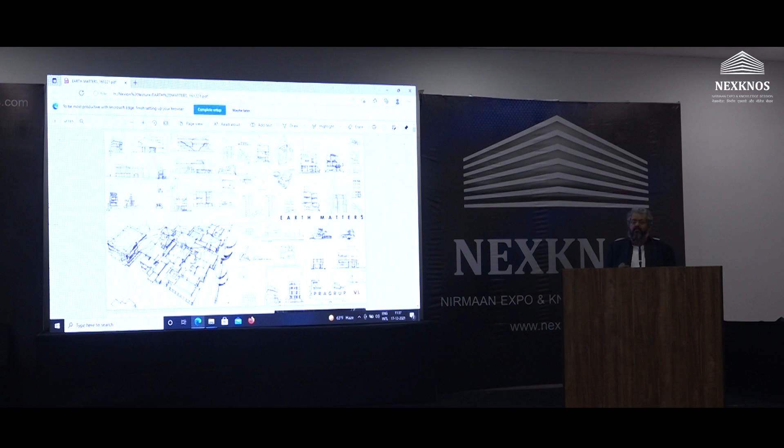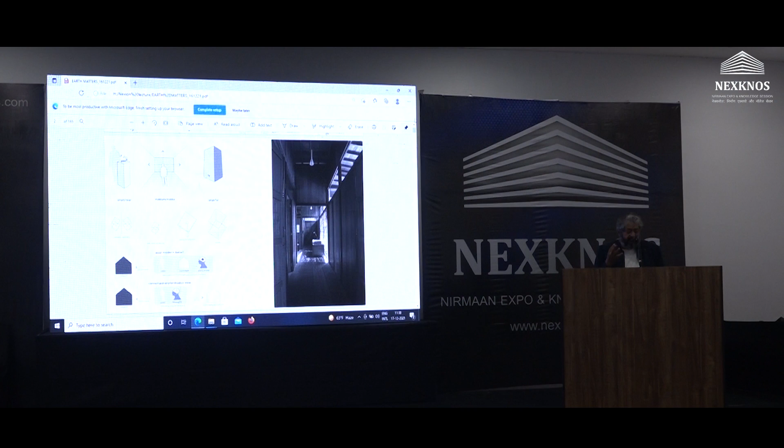At the end of the day, a little consciousness of the idea that Earth matters is all that is important, something we must bring to our life every day. From the space understanding of any kind of experience or architecture we do, it's very important that we establish four simple planes. That's something primordial to every piece of creativity we add. But how do you do that? It's not just a question of letting buildings happen because of the idea of space, next.

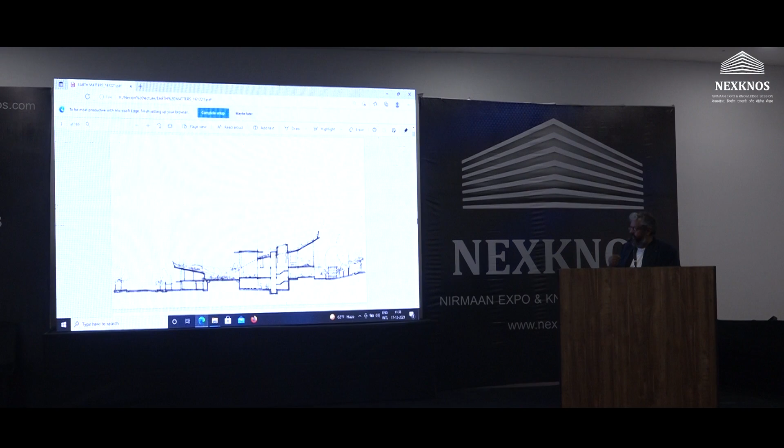It has to have texture, material, understanding of light, understanding of elements. And sometimes we also radically shift to an idea. This is a large house we're doing, around 35,000 square feet, which is interesting because the person can actually cycle up to the last point of the terrace on top, along the edge line. He can cycle right from the entrance gate to the third or fourth floor level, and the section allows you to do that. So again, simple elements like that become the creative impetus we start working with.

It doesn't have to be—architects are here—it doesn't always mean you have to draw a plan and then evaluate the idea of how the spaces work. There are many methods in which we can explore and position.

Now, this is one of my most perfect, beautiful, joyous projects that I've experienced building, which is our own studio, where around 55 of us work. It's more like a workshop space where we have building material and an experiment lab. On the ground floor, we have a large store which also presents architectural products.

Then on the 5 floors we have various studio spaces for each person to work in a comfortable environment. Almost every person gets around 15 feet of table space where he can stack his books, materials, samples, papers and drawings. Added to that, we have an amphitheater where every month we try to host a concert, a lecture event, or some sort of discussion.

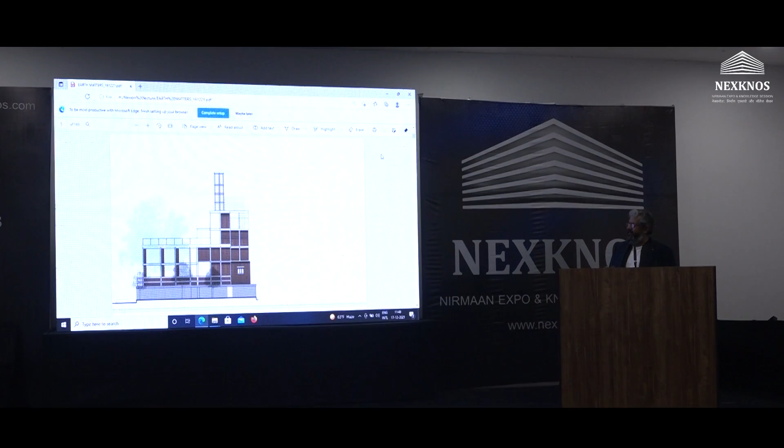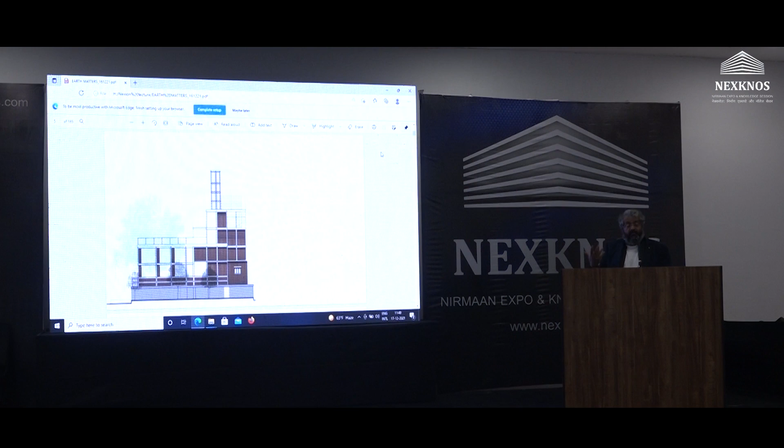It's that sort of facade element which is very simple in terms of architectural presence. When I was drawing this, I was inspired by the words of Aldo van Eyck, who said that a home or a building is absolutely complete only when the passerby doesn't even notice it. It has to gel so well with the rest of the environment, the context and the urbanity, that it weaves more happiness into that space rather than scream and be loud and expressive of its own presence.

So that's the kind of section you see, where the whole building was actually built on two heritage structures, built before independence. It was two houses that we bought. On top of that, without even demolishing the structure, we just put an RCC edge line wall to reinforce the foundations.

And then we put a whole new structure on top. So when we were discussing with the structural consultants, my idea was to build a very light structure in terms of its own dead load.

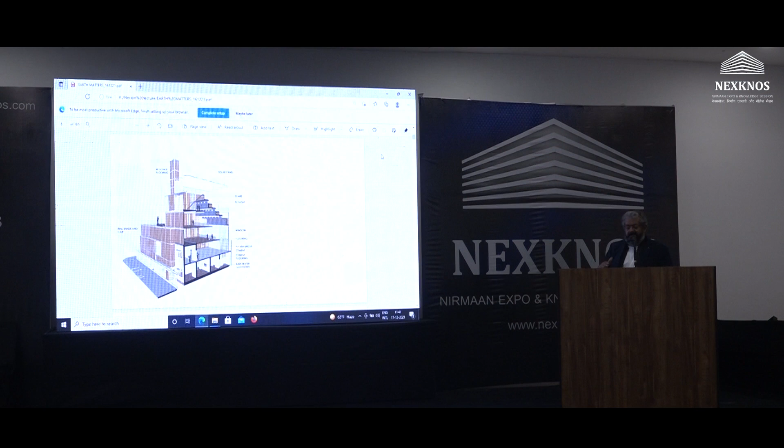Reshma was the site engineer who program-managed the whole project at that time. She's an interior designer and architect, and she helped us monitor every single day what was going on with all the floor plates. All the floor plates are made of timber, so there's no concrete at all, and the final rooftop is made out of precast RCC panels.

Very recently, two months back, a gentleman who actually lives around 6 blocks away came down to my office just to congratulate me, saying that when we built this whole building, which is so mammoth, we didn't destroy the street, nor put any debris on the road, nor was any building material ever dumped onto the perimeter.

The whole thing is a prefabricated element. There is no wet work, no mortar. Everything is bolted into position and erected.

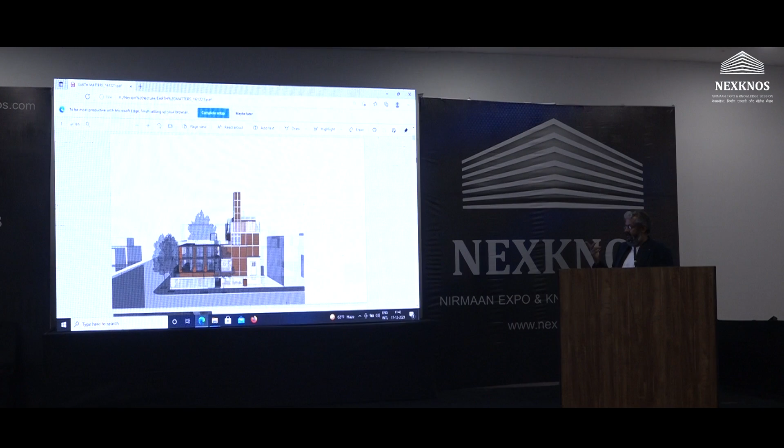Next, these are the actual pictures of the space. This is the roof profile of the amphitheater, and you can actually see from every floor the other floor, so it's easy to talk to people. You don't need to use intercom facility—you can just scream out and ask them to hand over a drawing or say something. 60 people can be in this one volume space, and it's very brightly lit.

That's the light that streams from the north edge so that the whole office, both east and north, is very bright. Ideations that we had done of fenestrations—these are very, very important.

Architects use these particular tools and methods to draw, and the more you draw, the more you make conversation rather than have a verbatim kind of conversation. It's very important for us to create as many drawings of ideas and graphics and design sort of surge, which helps us to actually understand what the building will be eventually.

It was also responsive to the kind of vegetation that was around. There was a very large tree, so we built around it. We didn't want to cut the tree or the branches, so we terraced the whole building to hug the spread of the tree, and the tree acts as a great canopy.

Wherever the shade of the tree was spectacular, we went ahead and put large panels of glass. Where we didn't have the shading device, we did the double wall insulation of the wooden panels.

These are actually existing walls which were built before independence. We removed the plaster and cleaned up the old original bricks, which were of super high quality, and we could just leave them exposed rather than hold the lime plaster, and it became another aesthetic connect to the whole space.

This is again made out of driftwood—you can think of doing even architecture and sculpture using recycled materials. These are pieces of wood which float off on the river, and it's reassembled. An artist friend of mine from Vietnam made this galloping horse out of it.

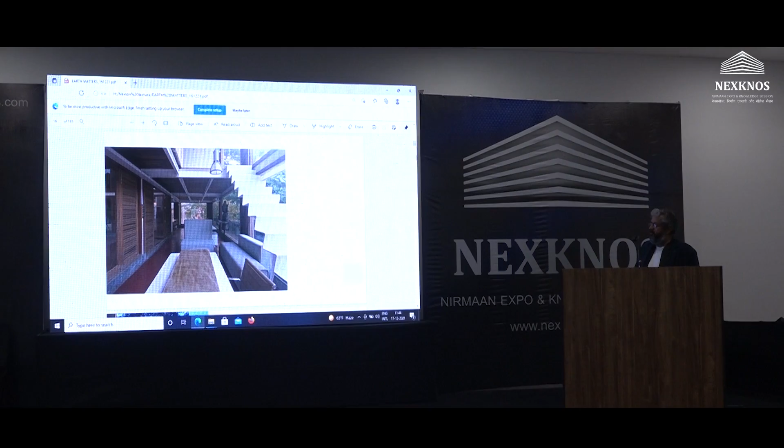Again, more workstation spaces, places to go to the mezzanine. You can see the timber floors on top. The red oxide was the original old floor from previous time. That's the, again, 13-year-old lift which was put into reuse.

We have a shortage of time, so these are spaces where we work out of. Every material, consciously, we said we must walk the talk—what we talk, right? So we made sure that every inch of material, every substrate of that material, comes from either industrial waste or is a recycled element. That was very important for us.

This is another facility which we recently completed phase 1 of. It was an old dilapidated club which was still surviving the test of time—a 134-year-old structure which we pulled back. We completely dismantled the whole roofing system, brought in engineers and carpenters from different parts of the country, and reassembled it to make this whole spectacular space come back to life.

They called us in and invited us to make a presentation. They were very surprised that we had created so much open space, because they had always lived on a completely habituated open ground. We started opening up this whole arena and said that we're going to not build spaces, but design only the largeness of open spaces for a club facility rather than go in for constructed areas.

They actually gave us a mandate of around 75 crores for phase 1. We said that we'll first develop the master plan, clean up the whole ground, and make parcels of land available to build. We only built 21,000 square feet of new construction. Now, of course, we are building another 35,000 square feet as part of phase 1.

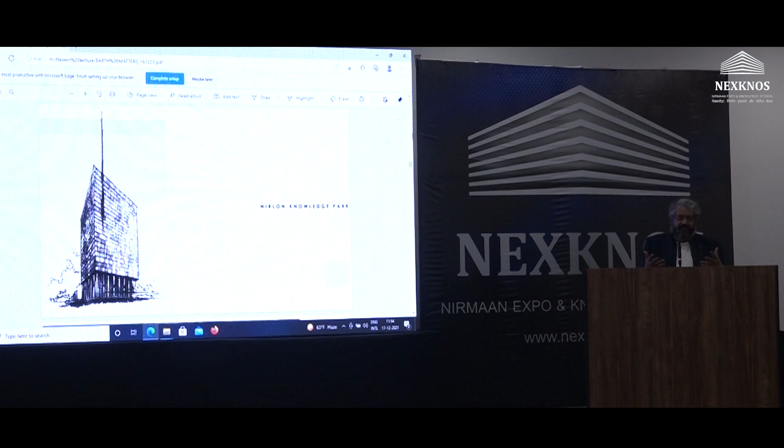Now I'm jumping into a different scale of project. This is the Nirlon Knowledge Park that we continue to build in Bombay. I've been working in Bombay, working with this client since 2002. He's not got bored of me at all, and he still loves to work with me. He's given us two other projects in Pune to build, each around 4 million square feet. Together, this is complete, 14 million square feet, 140 lakh square feet of constructed area, built over a period of 18 years.

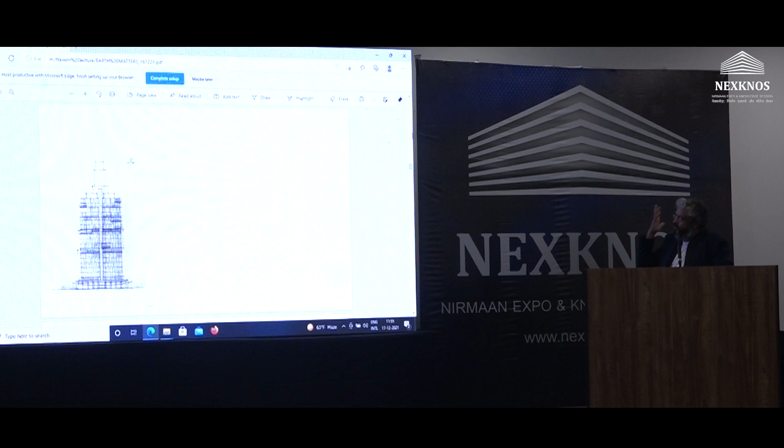Some of the sketches we started doing - this is what I drew in 2001 for the main tower, and then we iterated. Mostly the problem with my office is they tell me I don't stop wanting to change what I want to draw, and I keep drawing more and more. These conversations, as I said before, are very important for an architect to have with his drawing board, so he can evolve ideas, make conversations with his drawing, and the drawings communicate back to him. That's how you evolve the idea of design, rather than thinking this is my first sketch and that's my final.

So these are various kinds of articulated elements that we did for the master plan and to create an urbanity.

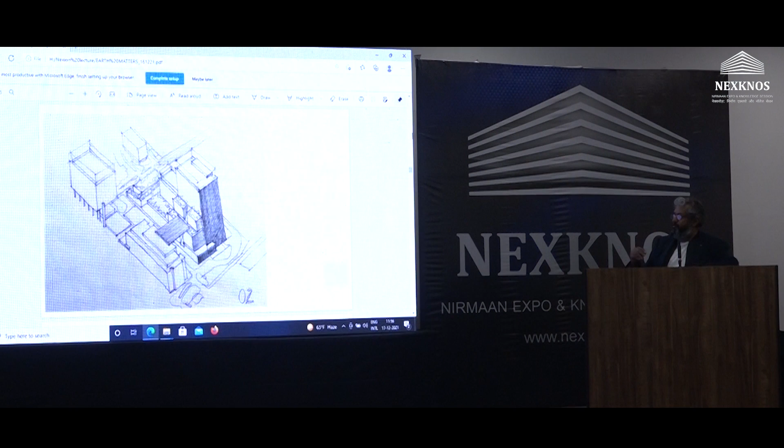This is one of the parks which I boast completely that even if Bombay gets flooded, there'll be no water in this particular area. We hired Dutch engineers who actually make dams and created the whole plumbing and sanitation and stormwater drain network. There were 3 Dutch engineers stationed on the site. We imported equipment and elements so that 4 levels and 3 levels of basement are absolutely dry. This is one of the feats that the client encouraged us to do, and we were able to achieve it while developing ideas of the master plan and how we integrated massing development.

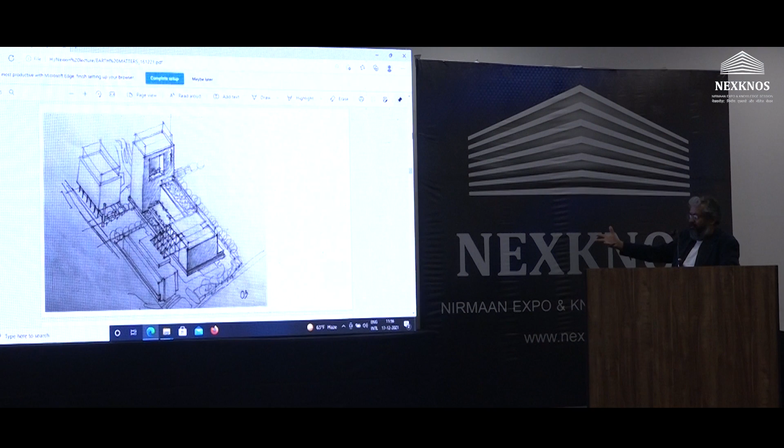Especially when you do a large 27-acre or 32-acre campus, it's very important to analyze figure ground - how a building actually captures the plinth space of what you want to build, and what must be the open space that it encapsulates. So these conversations become very important.

And this is the tower that we are building now. JP Morgan has actually bought the whole building, 5 million square feet, in one shot, which was the largest real estate transaction ever done in Bombay by one client.

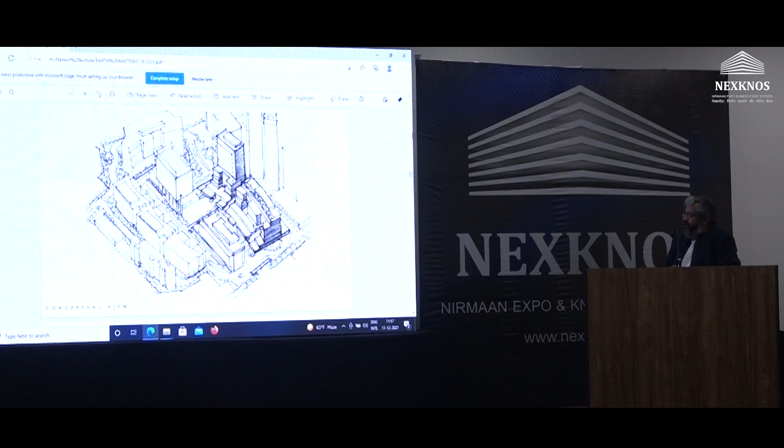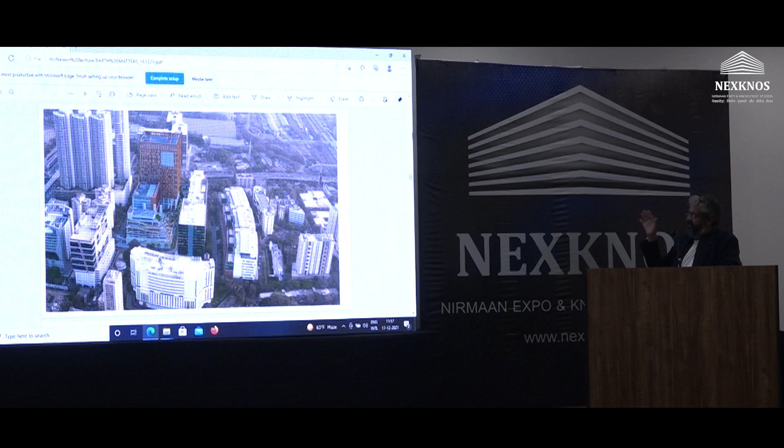That was the master plan, the final master plan that we did, and some of the work sections. That is the actual built master plan that we have today, and these are visuals of what is there at the site from an aerial point of perspective.

All this water is coming from the toilets, urinals, and wash areas of the whole building. We filter it, and there's a 1 kilometer long water body created for aeration, which is the central aspect of the whole landscape. It was so beautiful, and the grass loves that water, getting the best nutrition it needs to grow healthy and happy.

The client was so impressed with this eventual product that he got married on this lawn next to the water body, and that was a great position of pride. He said, 'I'm not going to go to any hotel because this lawn and this water body is precious.'

This is again recycled content, which we are programming into a very large structural element. It's a spectacular space where people sit around in the afternoons and evenings, whiling away their time, and they have music concerts happening here too.

That's the lobby space of the tower. It's a 7-volume structure, and from an aerial view, you see how we built different phases of different scales of buildings to bring in a multichotomous kind of architectural experience, rather than making one tall tower or similar tall-looking buildings across the campus.

So all the terraces become very interactive and accessible. Each facade is different - for example, the north facade has a lot of glass, east has less glass, while west and south have no glass, only the absolute minimal needed.

So the buildings were looking very funny. When we presented to the client, he said, 'Why is your building looking very different on all 4 facades?' But then when we showed him the simulation, he was impressed.

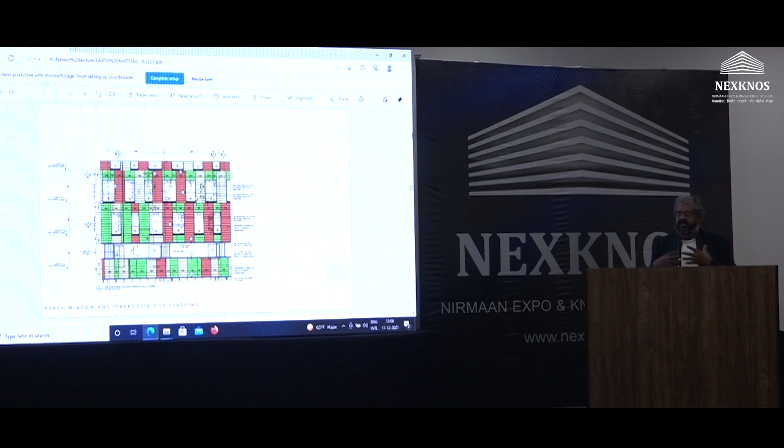We told the glazing contractor that we didn't want to do a 4-way unitized system costing 1,800 rupees per square foot. Instead, we did simple punch windows costing 650 rupees per square foot, and used the saved budget for external paneling with terracotta wall panels in 4-5 different shades. That's the sections of the plan.

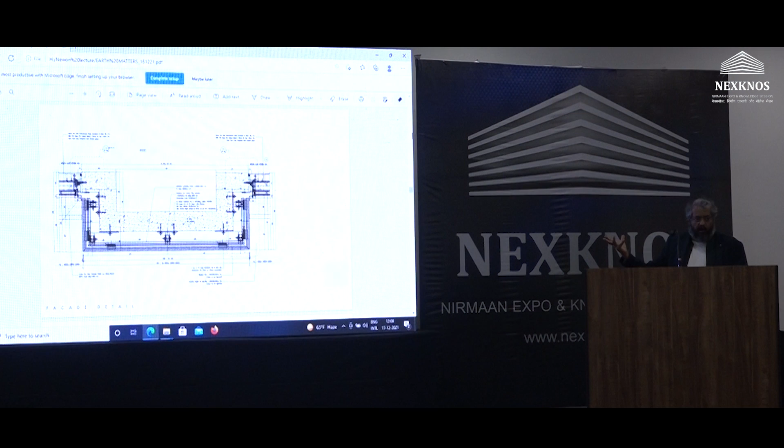Next, how the thermal wall insulation works. It's a very complicated wall that we designed, but it gives us the temperature we desire, especially during peak summer, showing the aspects of how the louvered elements were done.

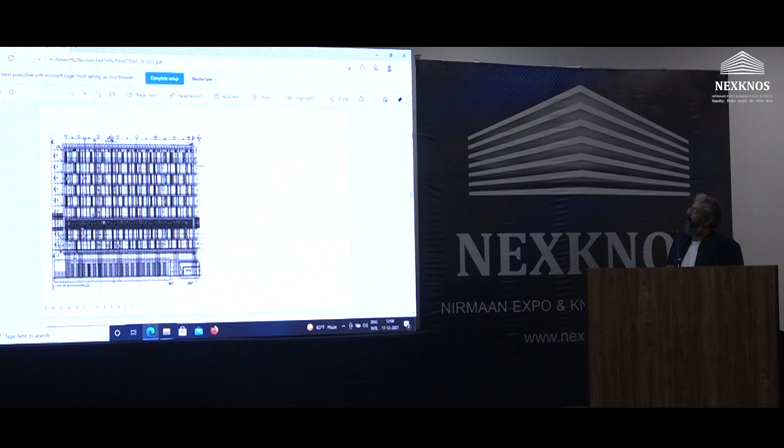This is the facade coming up as we talk now - the construction happening for the 4 million square feet tower. Also within the campus, when I was talking to Kunal, his father actually built this.

This was a factory, the Nirlon factory, where Sunil Gavaskar had his first job. It was important for us to keep the historicity intact.

So the glass tower you see, the 5-floor glass tower, has this huge wall mural where all the photographs they captured of their factory were positioned, and there's an experience museum there.

These were the chillers, generators, and the electrical panel which gave energy to the previous factory complex. We designed the master plan carefully so that the chimney and the old energy block was retained, and now it's a bar, cafe, and restaurant which feeds the afternoon cycle of people who want to eat out.

We haven't even removed the chimneys or the exhaust ventilators, and it's a great experience to sit in what was once a chiller plant room silo, having lunch or enjoying a bar experience in the evening.

And this again becomes like a memorial. So it's important for us to hold that historicity and significance of heritage back into a position to keep memoirs.

That's the walkway line and huge wall ceramic murals. All this is terracotta, completely made out of clay.

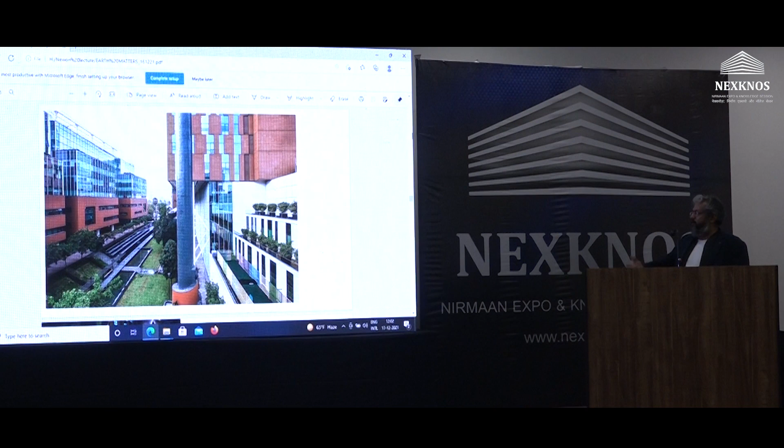That's the chimney where we included an artist to create the idea of an azimuth of the earth, and to also give an experience of an ascent, which are certain jargons that most of these corporate honchos would love to talk about. So it became a symbol of that sort of an experience.

Many terraces to include landscape. We actually gave back more earth to the site than we captured. We have almost 24% coverage, but we've added 68% more green terraces and green slabs for the project, which adds more surface area of ground footprint that you hold back than you build. So it is another spectacular marker that we think we should do for the project.

The silo, this is the ascending man sculpture, next, which was actually the old chimney.

What is fascinating is the water body has edges with many filters, block lines and pump lines, so it can be easily serviced and accessible. Some of the staff take responsibility of working with that as part of the workshop area, which is fascinating for the campus.

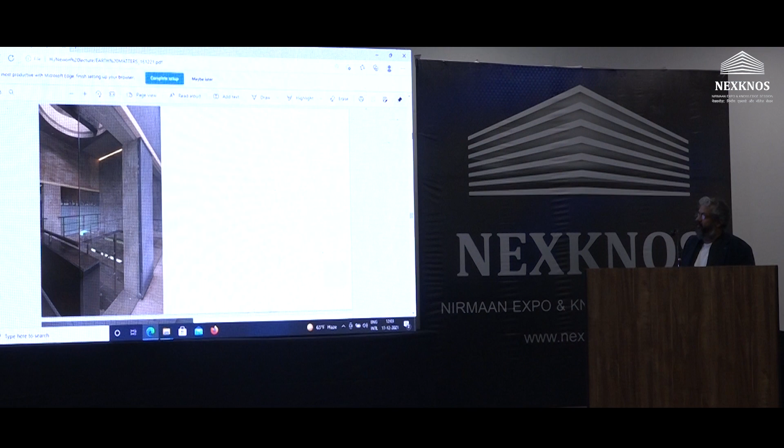Reception centers. This is the inside of the restaurant and the cafe, the silos of the chiller plant. That's the present phase of the building. B11, 10 and 9 is what is coming up. It's going to be occupied by JP Morgan.

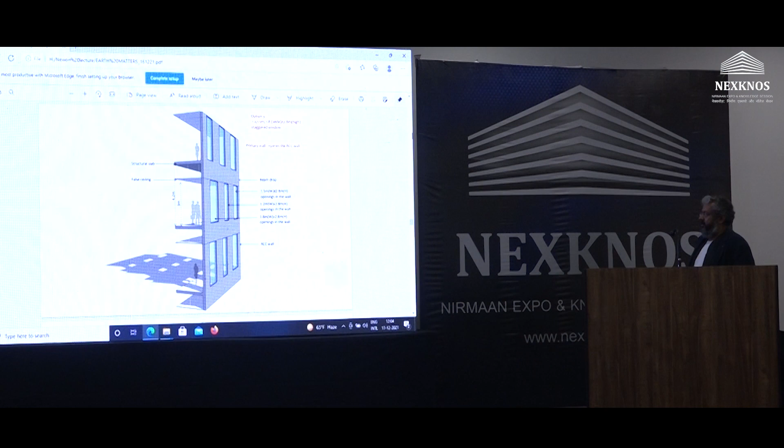That's how the skin of the wall was done. It was an RCC solid shear wall. The terracotta paneling, next - an additional layer of paneling was done as a secondary walling system.

That's how the facade actually looks. It's a very multicolored matrix. It's the diversity of India, I call it. It's a very, very bright orange building. Mr. Modi might like it.

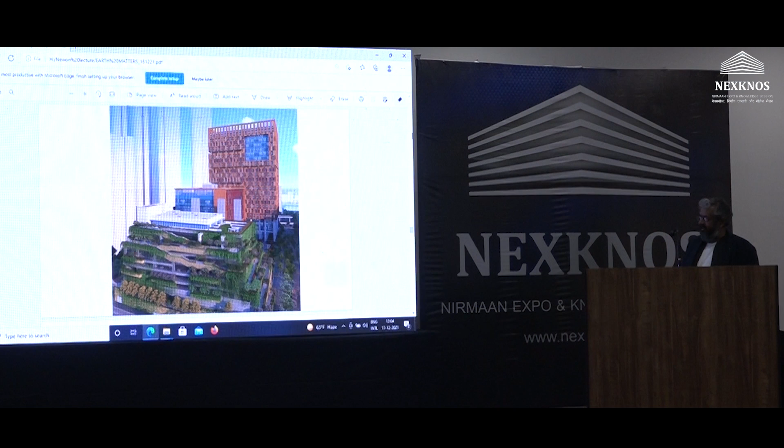Another facility that we did in the same region, Lupin Laboratories, which has been positioned for the third time as the best laboratory practice and architecture award for Asia. It also won the WAF award for the best landscape and architecture master plan.

The principals and people were working in a campus which was low rise. We wanted to bring in a certain joy of experience for the first 3 levels of laboratory, so that they actually sit in landscape and work.

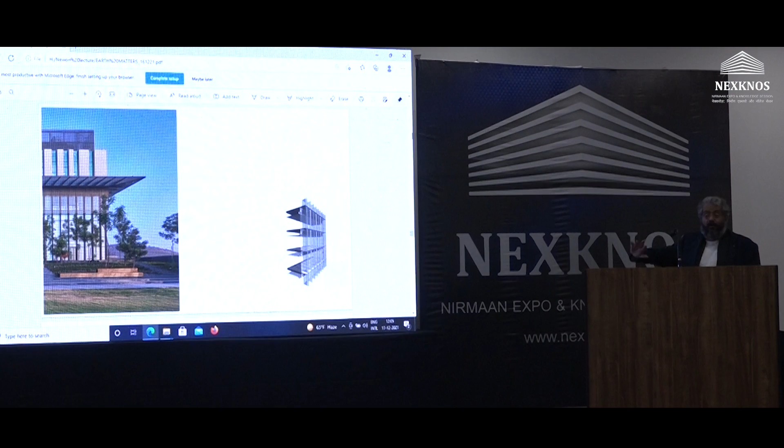So we made an all-glass building, which is a very contrast to most other kind of architecture, but we started working on the landscape.

Each of the glazing systems was done as a triple layered glass with not only hermetically sealed elements within the 2 sandwich panels of glass, but there is a layer of another airlock before the other panel of glass. The plan was very, very simple.

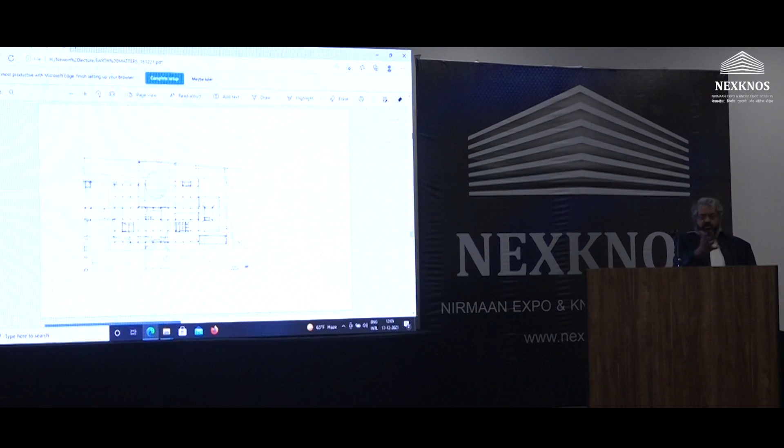It was built like a cabana pavilion within a huge landscape precinct of almost 6 acres, and the ground footprint was kept as low as 31%. It was a low-rise structure, and all facades of the glass completely connect to the landscape. So we started actually designing the landscape as a master plan idea first, before even doing the building.

That's the amphitheater, which is actually annexed to the principal's cabin. He loves to meet his people and discuss with them, have conversations. So we gave him a space where people can gather.

All the perimeter wall panels, what you see as a vertical element, just like what you saw in the studio, is actually timber. It's a timber, aluminum, steel integrated secondary skin, which acts as a support structure for the whole building as the tertiary column wall line. That also adds to the making of the building, where you use the glazing system as a support structure rather than just as an added-on skin to the whole building.

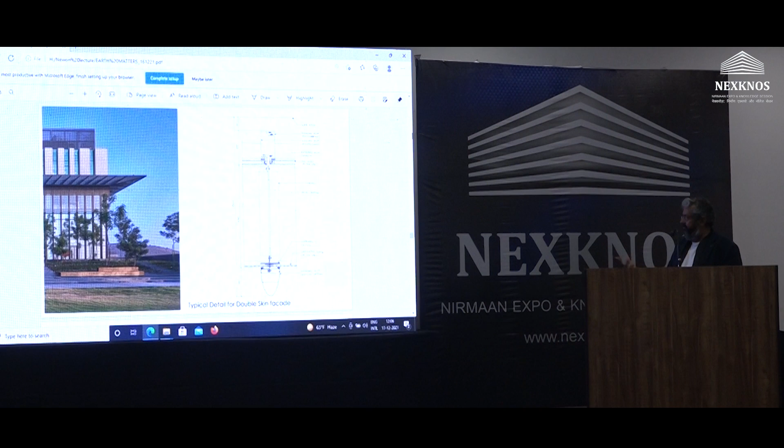These are the landscapes as you arrive into the courtyard. Next, some of the details that we worked on.

The corridors, which are only for access to service and to go into AHU rooms and some of the solvent stores. It's a very intense laboratory, which actually works on tuberculosis and on Ebola.

That's the landscape that you actually connect with when you sit in an office space or a workspace environment and you see the outdoors.

The wooden pavilions, and all of them are networked and wired, so people can actually grab their laptops and go and work there.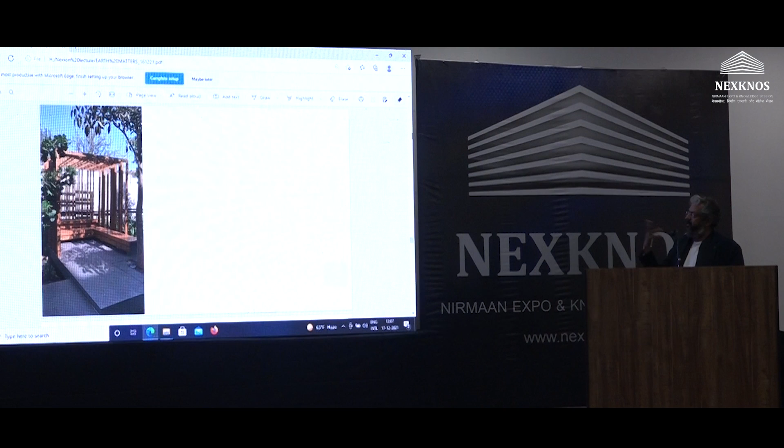This is the experience from the inside of the workspace area to the outside. This is the boardroom view. You actually feel like you're in a boat.

These are the vegetable gardens we added to the perimeters of the dining facility. People take turns bringing their own plants, and they have to post pictures showing how the plants are growing and how much vegetable they got. They must weigh that on a scale. We started discussing this with the boss of the company, and he was very excited and said, facility manager, you must make this happen here. Now they actually get awards as a corporate for having grown the maximum amount of urban farming vegetable garden, and it's spectacular that they've won that award twice in the country.

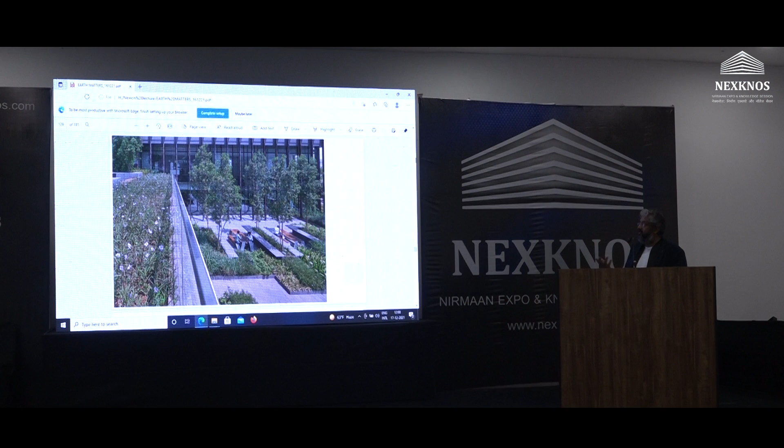These are things that we as architects must initiate, educating the client to grow into these possibilities and making it a narrative for them to experience the building not only as the presence of architecture, but as a functional realm that we can add on.

That's the amphitheater, night space, night visual. We use elements of the structure itself as sculpture. For example, this whole walling system became an idea of composition.

This staircase, for example, is actually a folded plate and a spiral montaged together. It was very complicated to resolve this geometry. We used Rhino to model it and give exact coordinates for how to build it, because it was important to match the curve of the concrete to the element of the folded plate.

What was nice is that eventually the client's family didn't even want to put any pieces of art in any of the open lobby, pantry, or arrival areas, because each structural idea of a staircase itself became a sculptural element that was experiential to that space. So we did not need any other art to exhibit.

That's what you see from the garden, and this is a super point of pride for me. This is a 13.5-meter cantilever, like a scissor, a staircase with no middle support. It's only held at the back. Imagine opening a scissor the other way and holding it up, and that's exactly how the structure works.

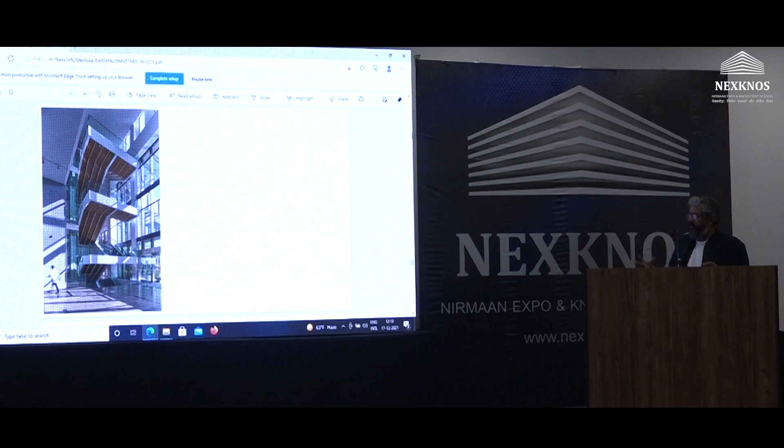Dravid was fantastic to collaborate with us to help build this kind of architectural structure. It has 4 different materials which come together, and structurally the composition of all 4 materials is taken into account to make this staircase happen. It shoots out 13 meters into space, a super sculptural idea — timber, steel, stone, and Cosentino were used as elements of the structural idea.

So this is the last project I want to introduce, Wipro Kodathi. We are still continuing to build it. Just yesterday morning, I presented to Azim Premji his corporate office floor of 3 floors that he's going to occupy, and what they call the garage, where they actually do workouts — meaning they test their software and test conversations of their software, how clients interact with their own personnel. So they make those experiments happen in the garage.

This whole building is around 1.5 lakh square feet, but the campus is 7 million square feet built up — 70 lakh square feet of construction — built in a record time of 5 years.

This is the campus. Again, we did elevated gardens, and each of these elevated gardens are bridge-connected, so cars will never meet pedestrians. We did not remove even one ounce of earth from the site. We have 3 basements here, and we managed to excavate 21 acres of land, putting all of that excavated earth back onto a mound to create an artificial hillock.

The site had a slope of around 13 meters, but we recreated the slope and made it into 26 meters in the central gorge. We have 4 boxes of basement, and all that earth removed and excavated was put back into the central gorge, into the natural virgin soil, increasing its layer. So no debris moved out of the site, which is very important in most project site situations that we often overlook.

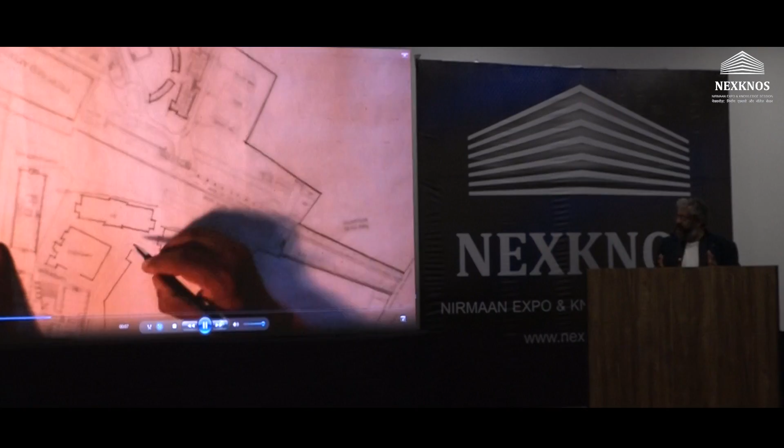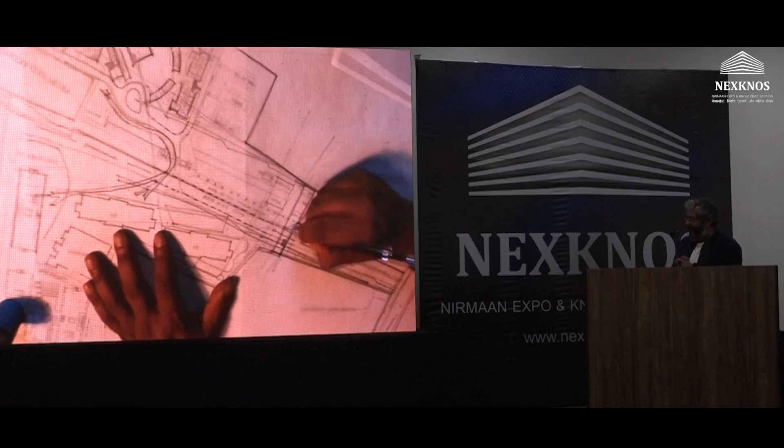This is actually a 5-hour drawing sequence cut short to just a minute. Most of these kinds of workshops I do with my team, my collaborators and my associate architects who work with me to make this project happen. This is just a sample of how a master plan is done, and this is what I do every day. At least 6 or 7 hours I spend drawing, and this gives me the absolute connect to how we must build and what must happen.

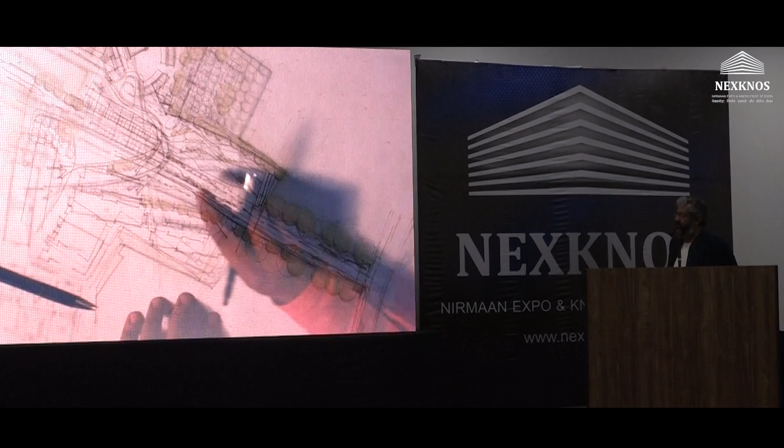This is just the master plan bridge connect that we were drawing to show what should be done per plan, and it has mostly every idea of the diagram and how they can further develop. Thank you.